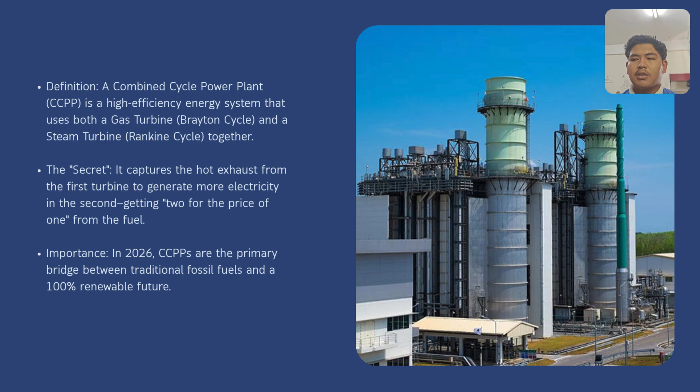Today, we will be presenting about a combined cycle power plant or CCPP and how fuel is converted into electrical power efficiently. First, what is a combined cycle power plant? A CCPP is a high efficiency energy system that combines two thermodynamic cycles: the gas turbine cycle, also known as the Brayton cycle, and the steam turbine cycle, also known as the Rankine cycle. The special thing about this system is that it uses the exhaust heat from the gas turbine to produce additional electricity using a steam turbine.

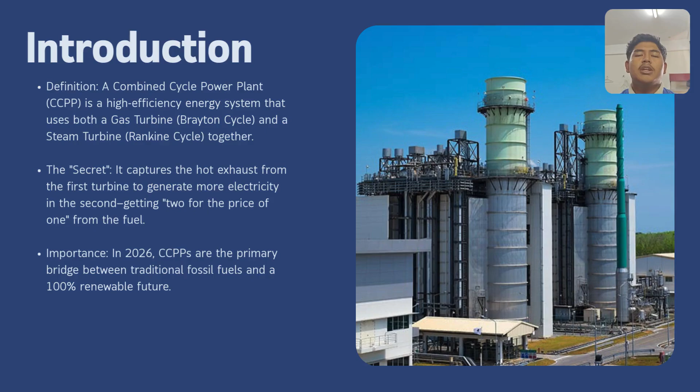This means we are generating electricity twice from the same fuel, which is why it is often described as getting two for the price of one. In 2026, combined cycle power plants are very important because they act as a bridge between traditional fossil fuel and a fully renewable energy future. Now let's move on to how the generation process actually works.

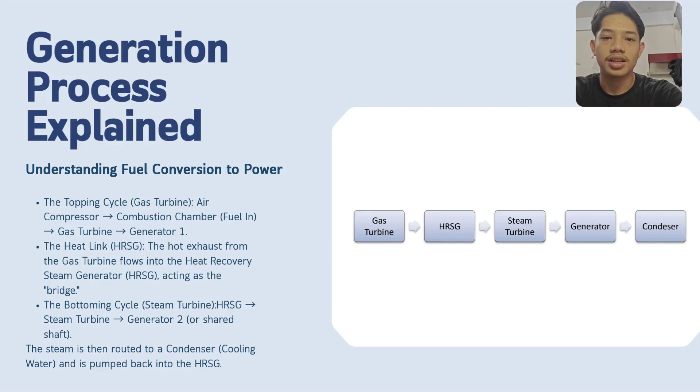Thank you, Aima. In the bottoming cycle, the HRSG uses the hot exhaust gas to boil water and produce high pressure steam. The steam then drives the steam turbine, which is connected to generator 2. In some designs, both turbines may even share the same shaft. After passing through the steam turbine, the steam goes into a condenser, where cooling water turns it back into liquid form. The water is then pumped back to the HRSG, and the cycle repeats continuously.

Now, let's look at a real example in Malaysia. The Sultan Ibrahim Power Plant in Pasir Gudang, Johor. Capacity is 1,440 megawatts. It uses the GE 9HA.02 gas turbine. It has efficiency exceeding 60%, which is very high compared to other plants.

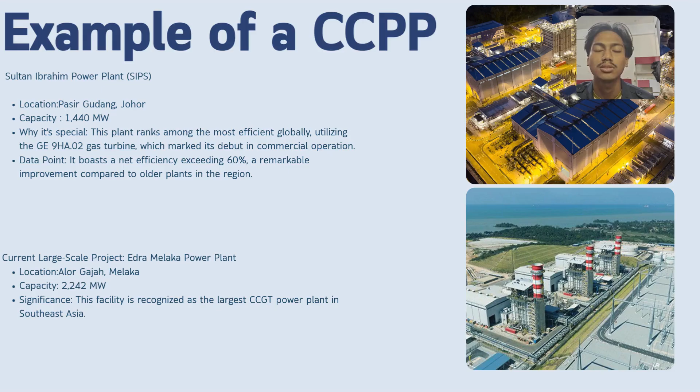Another example is the Edra Melaka Power Plant in Alor Gajah. Capacity is 2,242 megawatts. It is the largest CCGT power plant in Southeast Asia. Now, I'll continue with the advantages.

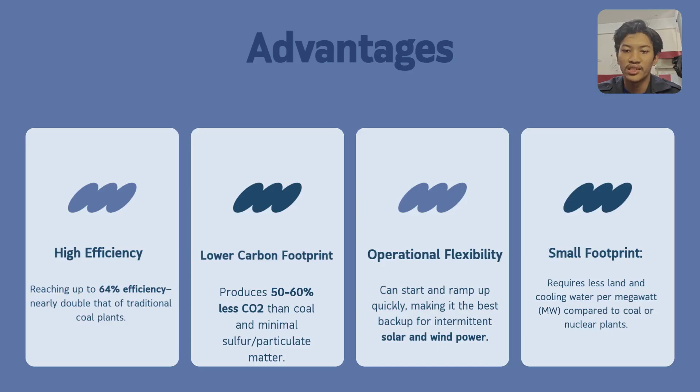Because of these advantages, high efficiency, lower emissions, flexibility, and smaller footprint, combined cycle power plants are considered one of the best transitional technologies toward a cleaner energy future. However, like any advanced technology, it also comes with certain disadvantages, which will be explained next.

Right. Thank you, Aki, for your explanation about advantages. Now I will present the main disadvantages of combined cycle power plants. Firstly, high initial capital cost. Compared to simple gas turbine plants, combined cycle plants require a much higher investment. This is due to the inclusion of additional systems such as the heat recovery steam generator, HRSG, steam turbine, condenser, and cooling system. The complexity of these components increases both construction time and overall project cost.

Secondly, fuel price sensitivity. Combined cycle plants depend mainly on natural gas as their primary fuel. As a result, any fluctuation in global natural gas prices can have a significant impact on operating expenses and electricity generation costs. This dependency also exposes the power sector to fuel supply risk.

Third, reduced efficiency at partial load operation. These plants are designed to operate most efficiently at full load conditions. However, when demand is low and the plant operates below its rated capacity, its efficiency drops noticeably. This can affect overall system performance and economic return.

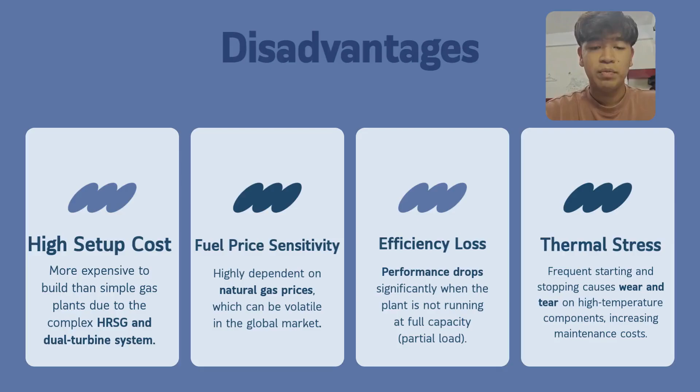Fourthly and lastly for these disadvantages, thermal stress and increased maintenance requirements. Frequent startup and shutdown cycles, especially during peak demand changes, subject high temperature components to thermal stress. Over time, this leads to increased wear and tear, higher maintenance costs, and potential reduction in equipment lifespan. We are done with these disadvantages, and we jump into the conclusion.

Alright, in conclusion, combined cycle power plants represent one of the most efficient thermal power generation technologies currently available. With efficiency levels exceeding 60%, they play a vital role in Malaysia's electricity system by providing reliable baseload power while significantly reducing carbon emissions compared to conventional coal-fired power plants. This makes them an important transitional technology in the country's shift toward cleaner energy sources.

Looking toward the future, combined cycle plants are expected to evolve further through the adoption of hydrogen blended fuel and carbon capture technology. This advancement will support Malaysia's long-term energy sustainability goals and contribute to the nation's commitment to achieving net zero emissions by 2050.